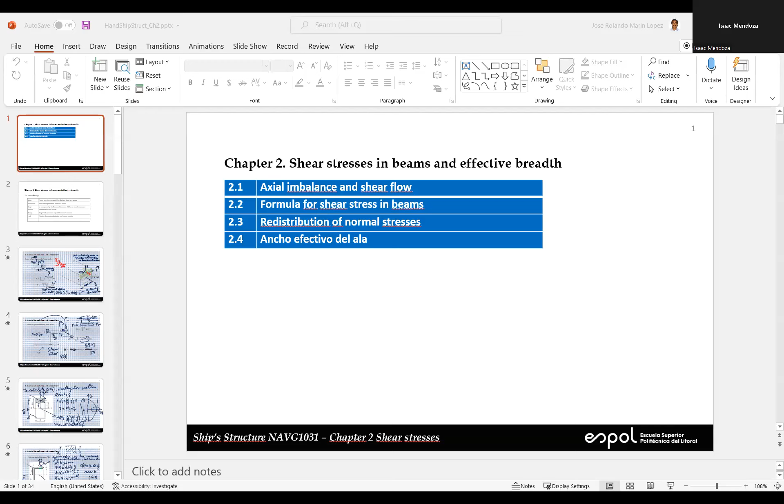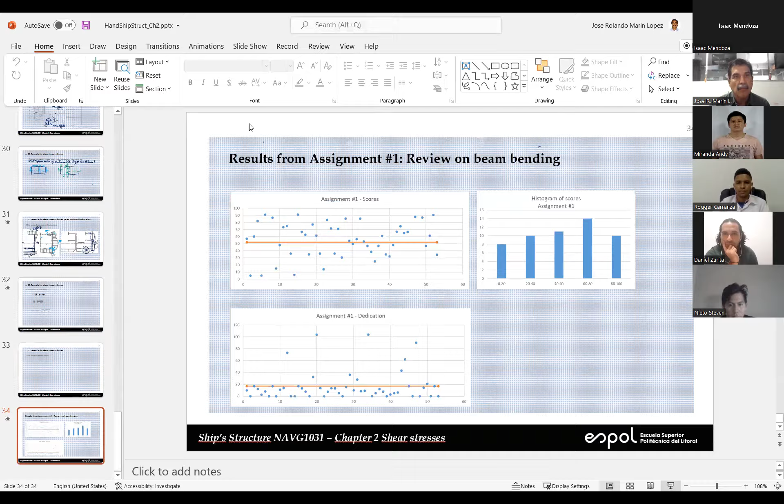Okay, let's continue. Andy, confirm me that you're looking at my projection. Andy, confirm me, please. Anybody? Yes, doctor. Okay, so I'm going to say two words, doctor.

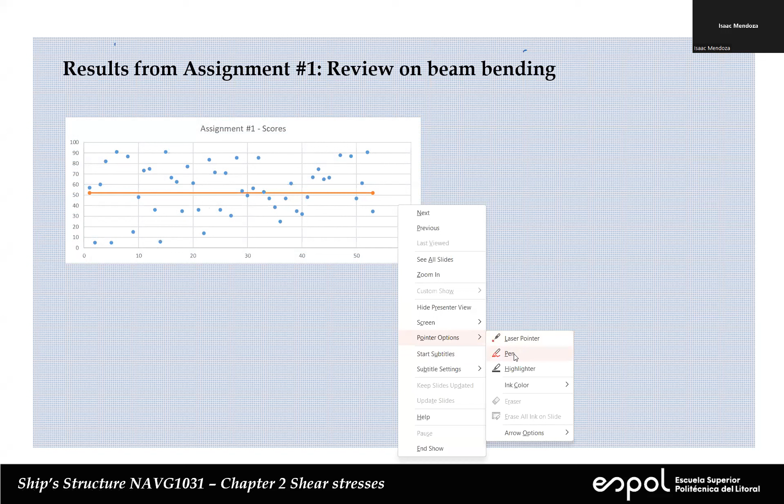About the result of assignment number 1, okay? These are the scores, the results of the evaluation. On the X axis you have the number of the student, and here you have the grade, the score that you obtained. This is the average, the average is about 51. So as you can imagine, an average of 51 is not something which I like.

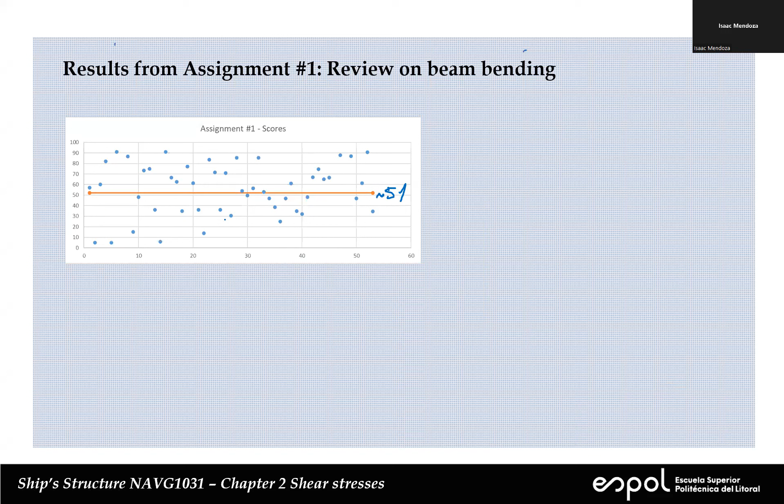I'm worried because usually when you have an assignment, you're supposed to come out in this area. So this, I don't know what they are doing. And even these people here, they're just around 60. So if you have questions, if you don't understand something, you have to say so, you have to come to office hours and things like that.

That's one thing. Here, this is the histogram of the scores. So here, you're supposed to be... okay, so if you are here to the right, that means you're above 60. And you see that all of these right now, they are behind the level for approval of this class. That means you better start working, because this is a review. This first homework is the review, so you were supposed to have already this material.

Something else, this is the number of hours, this is number of hours you reported. And these people here, they say that the time is larger than 60 hours. That's a lot. So at some other time, I would like to contact these students, because that just looks too much.

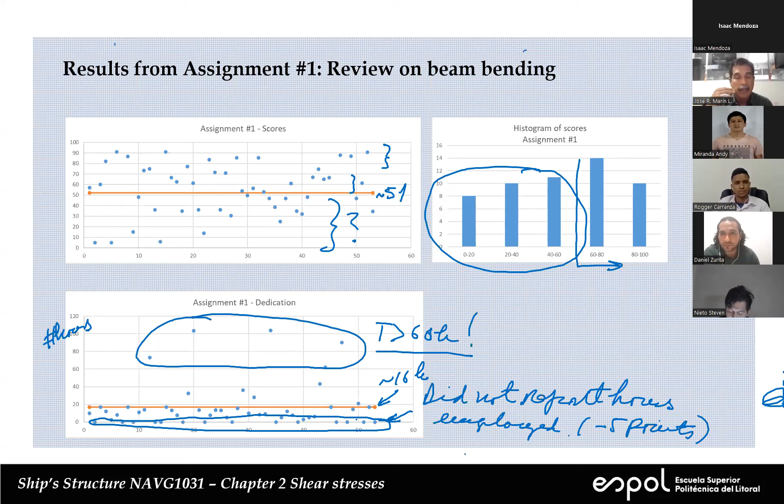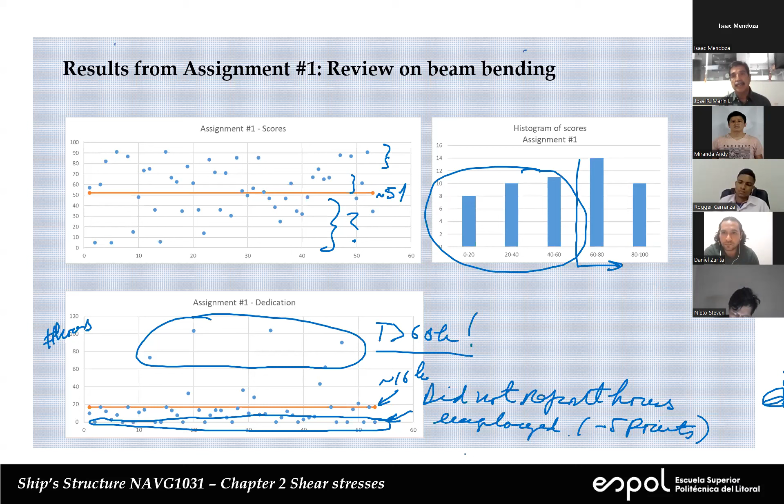That's enough. So from here, 2 messages. First, if you do not understand something, you have to come to office hours. You have to send a message, either to Engineer Isaac, Andy Miranda, Maria Sayo, or myself. We have office hours all over the week, you know our email addresses. If 2 or 3 people mention that they do not understand one question, that means I didn't explain correctly.

But the only way I can realize that something was not explained correctly is that you mention it. That's the only way. Otherwise I'm going to assume that it is well explained, and it is not. The problem is I don't have a way to know that this assignment was not correctly explained, unless you start asking me about it. Okay, people?

So let's go now to the description of what you are going to be doing Wednesday and Friday. Go on, Isaac. Okay.

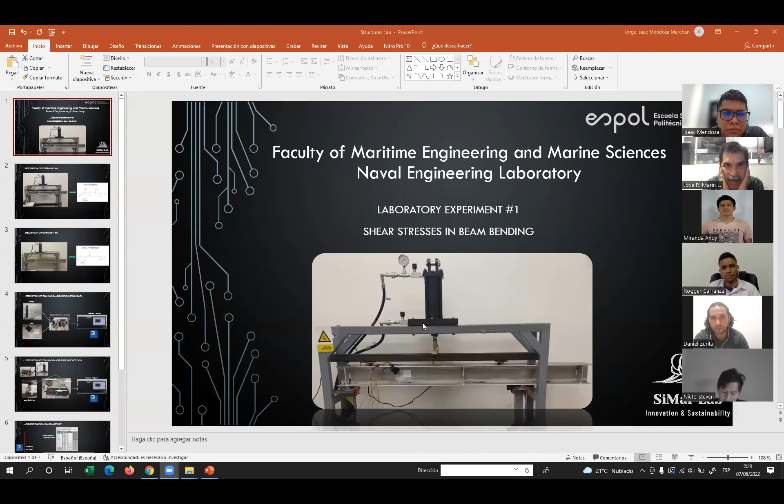Okay, good morning students. I'm going to give a general description of the experiment you're going to do in the lab, specifically Wednesday and Friday. In these two tests, you are asked to calculate the shear stresses and the effective breadth in these two cases.

So the first case consists of an aluminum beam that is simply supported. You can see the support at the left end and the right end. The first test consists in you applying a force, but this force is divided by 2 because it is supported by 2 supports.

Immediately you see on the right hand side the free body diagram. So you see the aluminum beam that is simply supported, and you see these two forces applied in a symmetrical form.

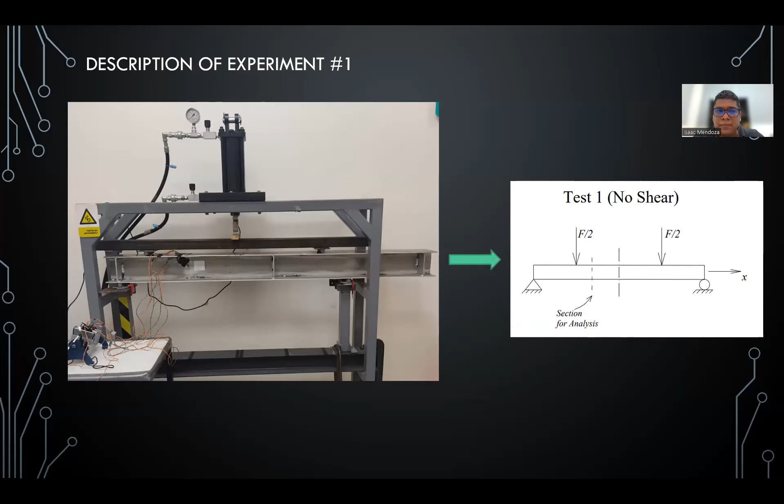Okay, the second test is similar. This aluminum beam is simply supported, but the force is like a concentrated force. So the distribution of the shear force is different from the last one.

Okay, so in this case, in these sections, you have shear force, so the data from the strain gauge is different.

Okay, the profile of the beam is a cross section type I. So you can take the dimensions when you come to the lab.

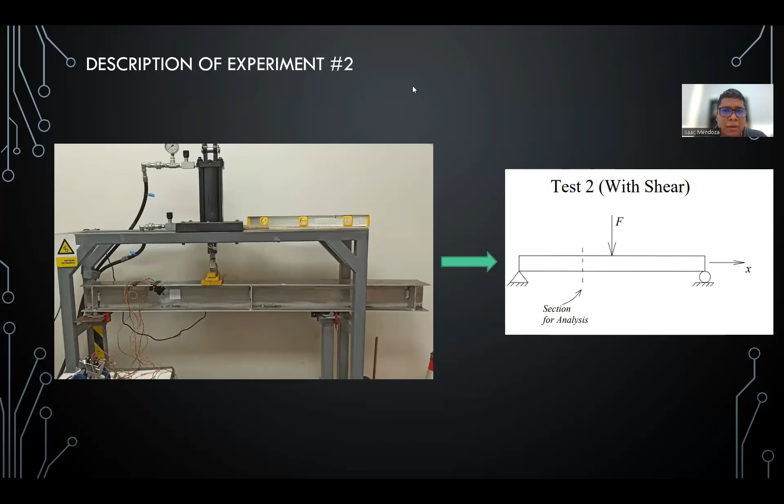The description of the equipment is the following. So you see that on the flange of the beam there are 4 strain gauges that are used to calculate the effective breadth.

And then on the web, around the neutral axis, you see there are three strain gauges. So this data from these strain gauges is used to calculate the shear stress using Mohr's circle.

Okay, you have to check this information from the past course. And in order to register strain data...

You have to connect these strain gauges to the acquisition strain equipment like this, and then in the same way connect this strain equipment to the computer. On the computer desktop there is a program called National Instruments plus Omega. In this experiment, you are going to save strain data and force data simultaneously.

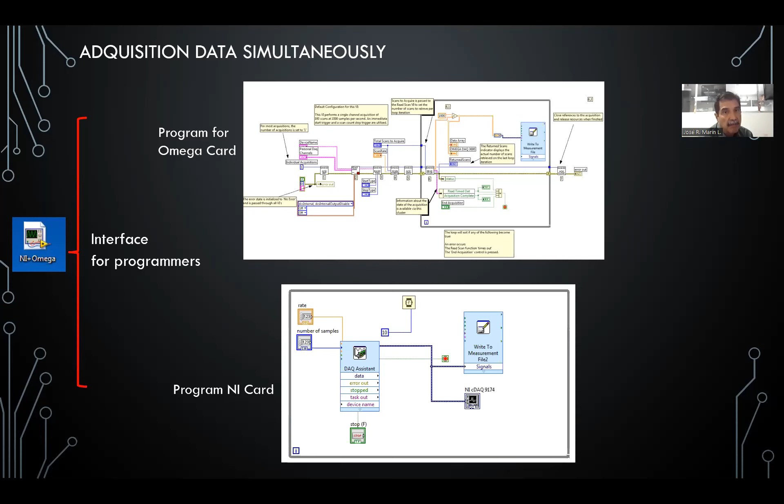Isaac, don't you have one of those files at hand so you can show them? After you finish this. Yeah, this is the finish, this is the end. Please show them, it's a good idea.

You see, for example, Omega data for the force, and then a strain gauge for the strain gauge. So in this folder you see these two files. Can you open one of those files? Yes, for example, the strain gauges. There's nothing... oh, there you go.

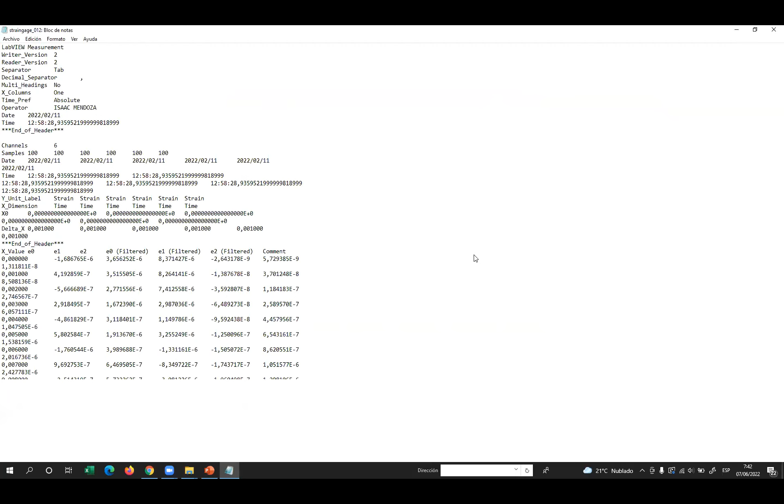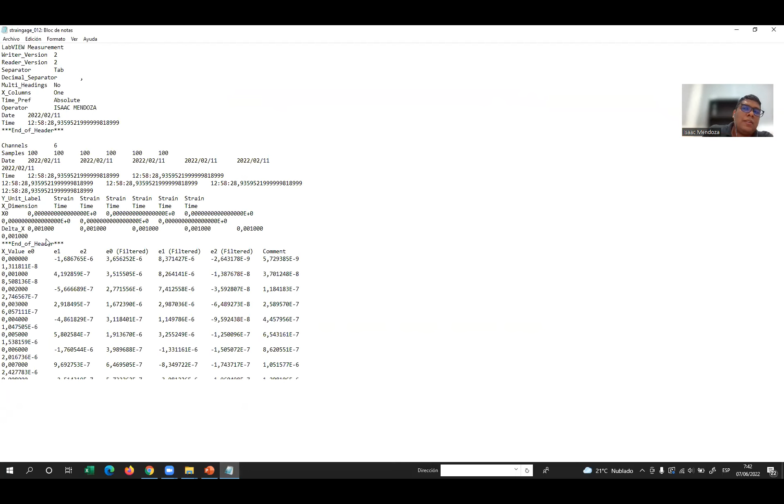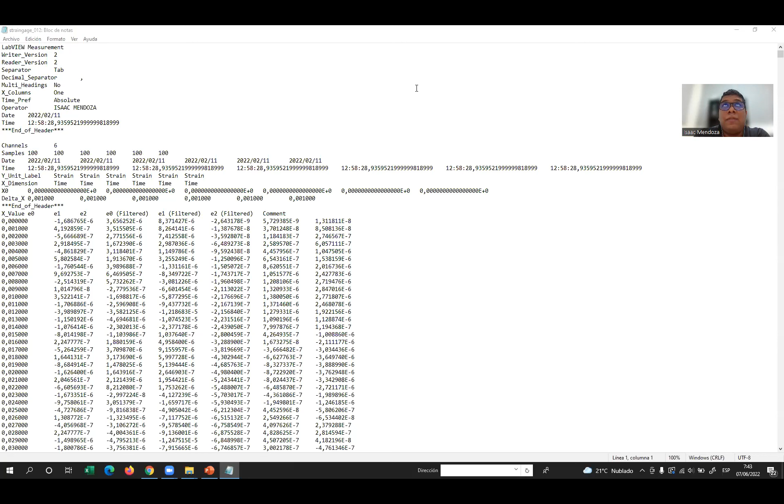This is from the other experiment, but it's similar to when you obtain the value of the strain. This is the column of the times, and then the value of the strain gauge. In your case, you have 7 strain gauges, so you have 7 columns in this part. In the other TXT files, Omega, you see 2 columns, one for the times and the other for the force in millivolts.

Okay, that's all, doctor.

Try to see what position on the beam corresponds to each one of the signals, and then plot against the force, because that's what we need. The problem is that the force is in the other file, so you have to take that information, put it in the same file, import it from Excel, and with the column of millivolts, convert that into newtons. And then you have to do the calculations.

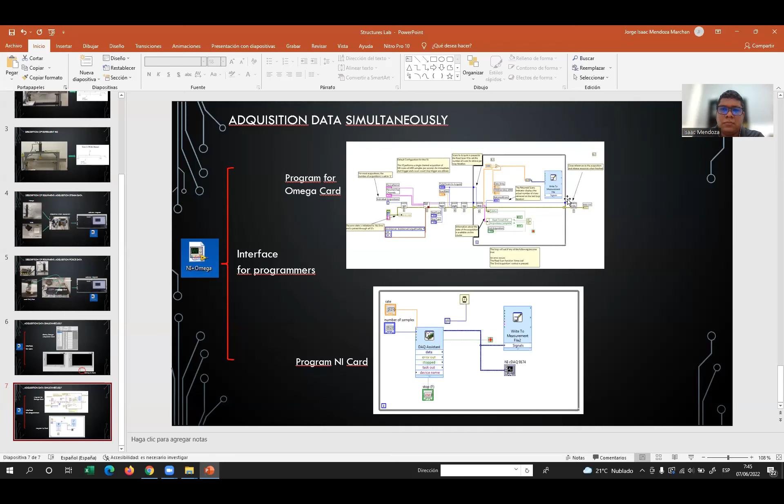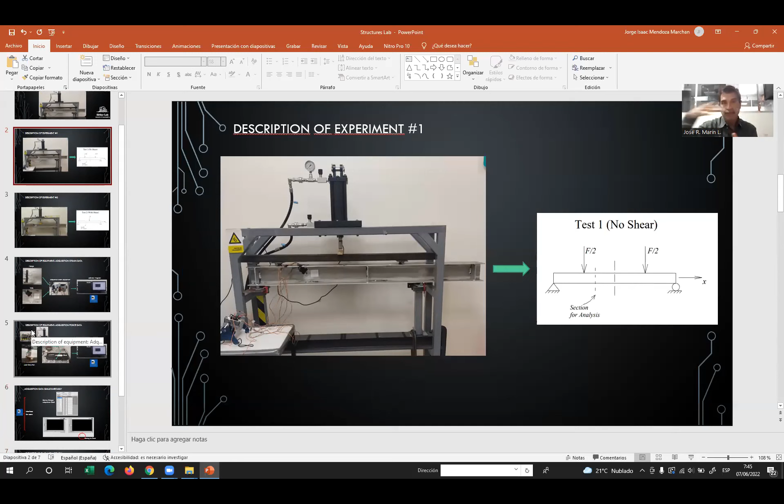With the 3 signals around the neutral axis, with the 3 signals in X, in Y, and at 45 degrees, you can calculate gamma. I'll comment on that later. From the signals on top, I will explain after we return next week how to calculate what we call the effective breadth with those signals. So you have to do those 2 calculations. That's the general idea of what we need to do.

Let me draw here. Can I draw here? Okay. Exactly, I don't know. Oh no, I can, give me here.

Even if you believe it or not, here I have 3 strain gauges. When you come to the lab you will see it in detail. There's going to be one in this direction, the X direction, that measures epsilon in the X direction. What do you think will be the value from that strain gauge? This one here, number 3, is located in the X direction.

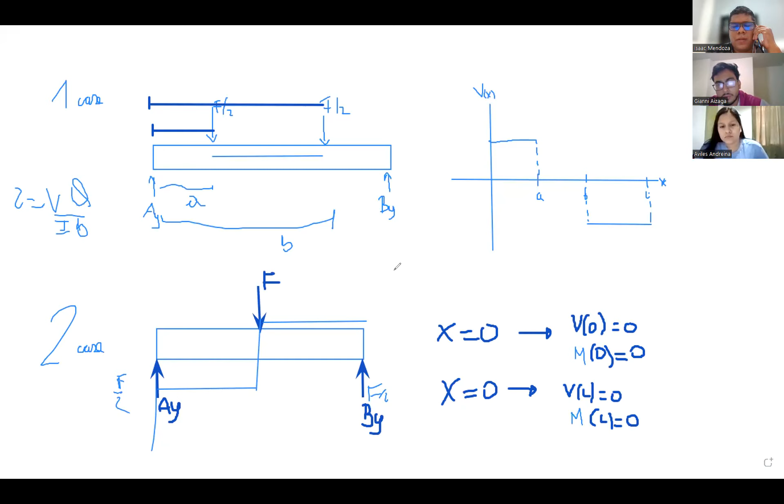Aló, doctor. Ya. Ya. Ya. Ya. Ok. Ok. Ok. Ok. Ya, doctor.

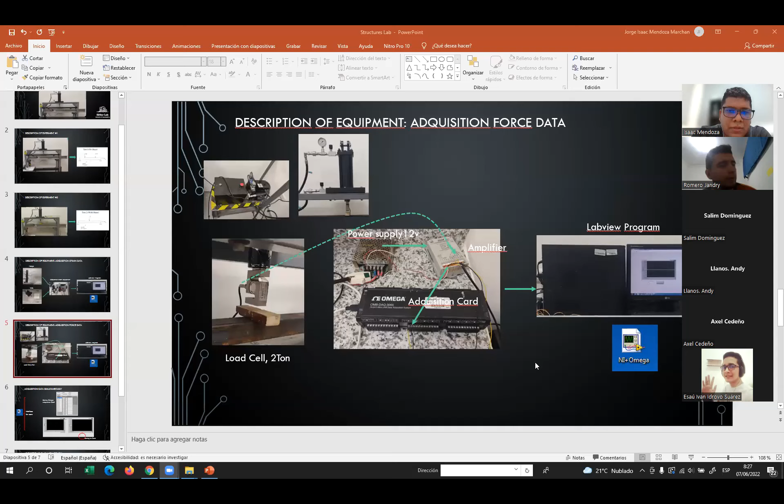Can you repeat the relation between the millivolts and the force? I didn't get it. The relation between the millivolts and the... okay, tons. Okay. 10 volts is 2 tons.

This is the formula. Okay.

So in summary, you have to prepare the distribution of the shear force in these two tests. When you prepare the distribution of the shear force, in the first setup you have no shear force in this part. But in this part, in test 2, you have shear force in these sections. So the graph is that.

So in this part, you have the reactions F divided by 2, and the other reaction F divided by 2. And this is the force. So the reaction is, in this part, F over 2. But in this part, in this first test, there's no shear force.

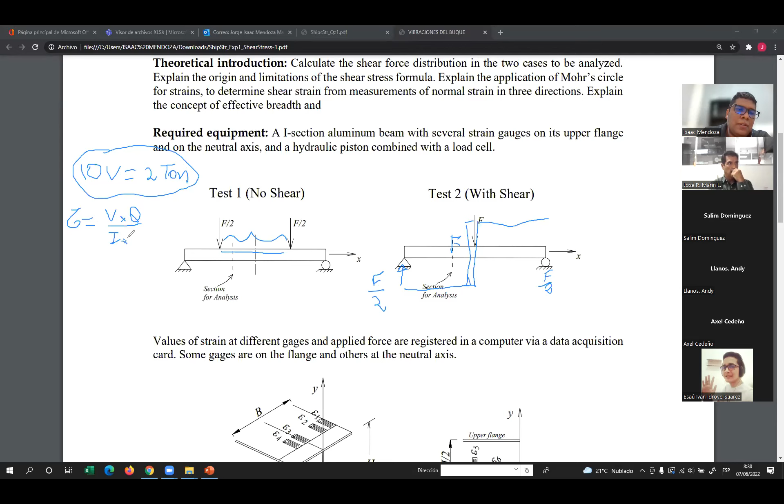So in the theoretical forms, you have to calculate the shear force. The shear stress is equal to the shear force, what else, Q divided by inertia per thickness, right? So this is the formula that you have to use to calculate the shear stress theoretically in these two cases.

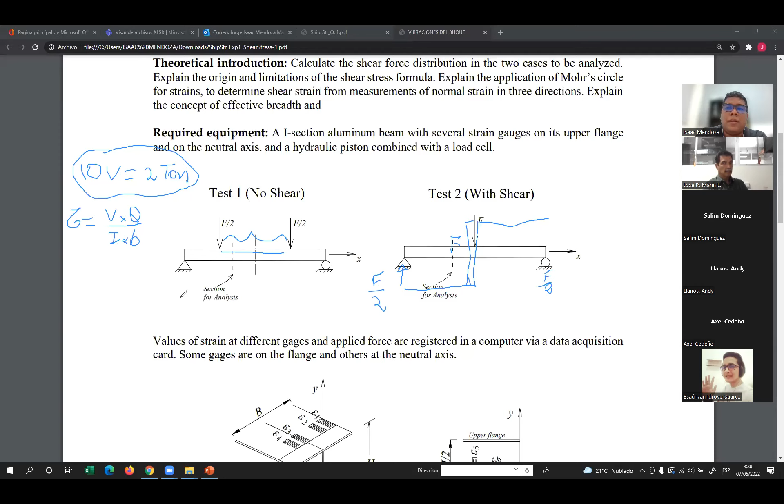And in the experimental forms, with these three strain gauges, you have to review the Mohr's circle in order to obtain gamma. When you take gamma multiplied by G, you get the shear stress in an experimental form. You have to review the Mohr's circle.

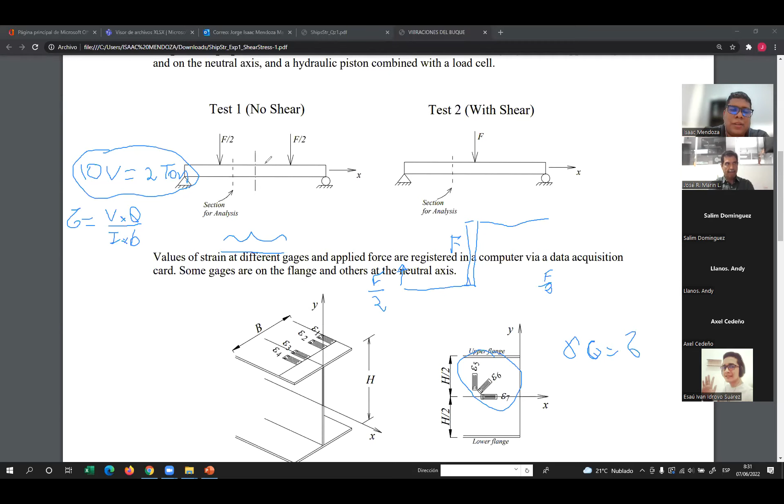Hopefully these two values are close, okay? Theoretical and experimental value. But you have to calculate the distribution of the shear force in these two cases. For this value of the strain data, you have to save it for this moment, and then when the doctor explains the concept of the effective breadth, you have to calculate this. You have to use this data in the next week. But in this week you have to concentrate on the shear stress.

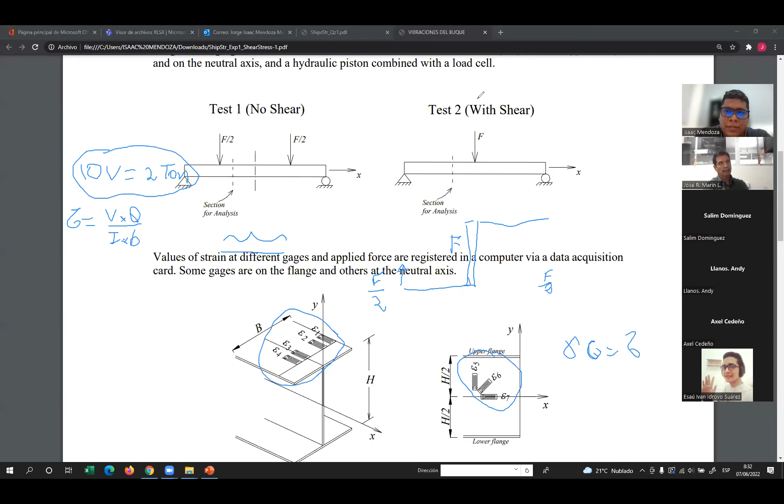Questions? What does it mean that test number 1 has no shear? Okay, because there are two tests. One, simply supported, the force is divided by 2, because the force is in contact by 2 supports at the top of the beam. In these configurations, when you resolve the problem and obtain the distribution of the shear force, what is the distribution of the shear force in this problem?

So you have to check, and in the middle, you don't have shear force, because test 1 is not shear.

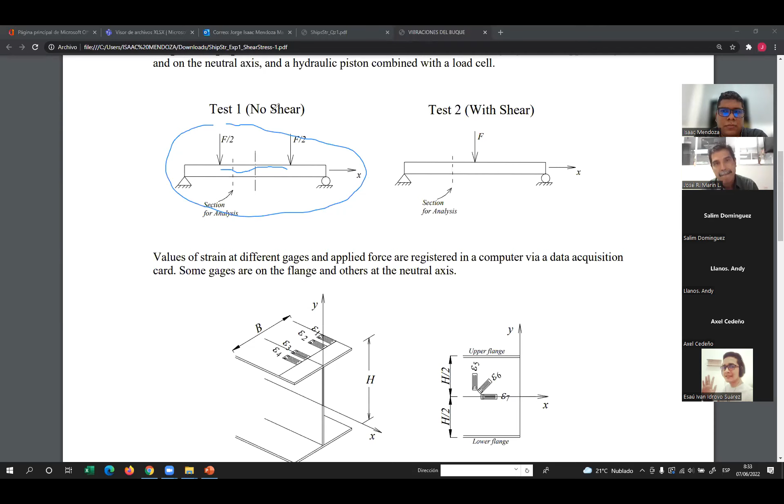Please, for the student who asked the question, make sure that you are able to check what Isaac said. Isaac is telling you the shear force distribution on this beam is zero between the two, F/2 and F/2. Please sit and solve the problem and check that it's indeed free of shear forces. And in the other case, he explained the distribution is here, then there's a jump, and you have another value. Check that.

Be sure that you are able to solve this. This is, please people, a statically determinate case. If you are not able to solve these problems, Isaac is in trouble, not me. Go on, Isaac, okay, this is easy to resolve.

So, this is a determinate case, simple supports, displacement 0, moment equal to 0, the p of x, these two concentrated forces, so you can go on and obtain the shear force distribution in both exercises, and then obtain the shear stress in a theoretical form and compare it to the experimental form.

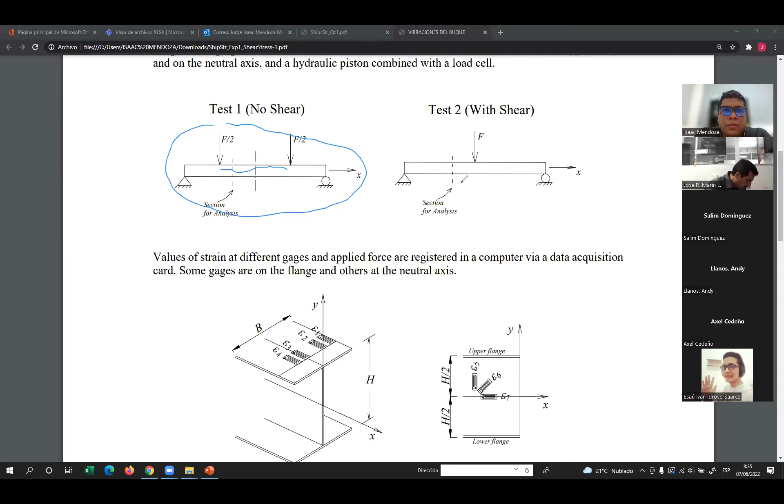So this is all for this experimental test. Now we are going to discuss in groups the last quiz that was taken in previous years.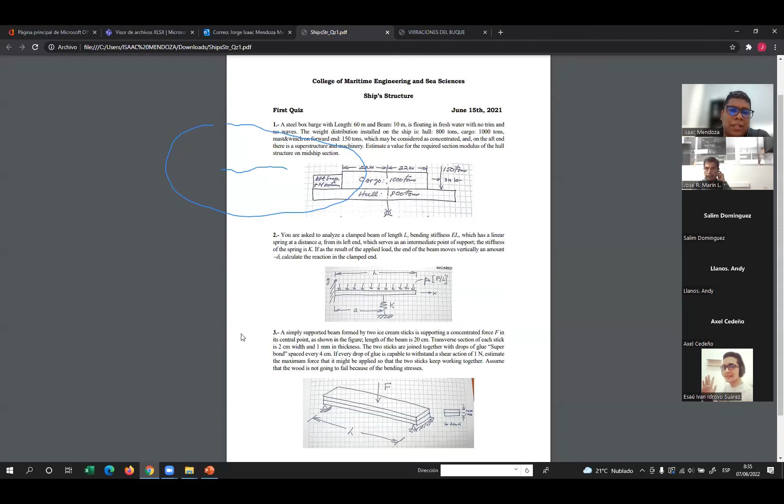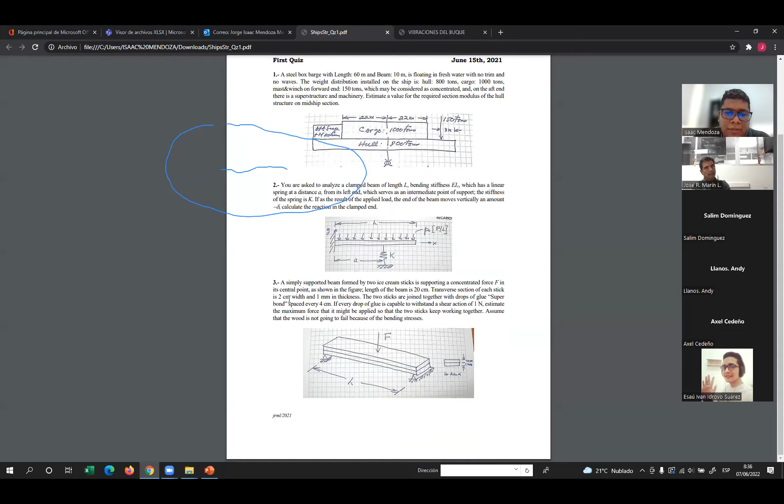So now we're going to work in groups. Groups number 1 to 4 resolve the first problem. Groups 5 to 8 or 9 resolve the second problem, and groups 10 to 12 resolve the last problem. Okay, I'll send you this by Zoom right now.

Okay, let me stop, then by message. Are you going to put it in a chat? No, I can't.

Let's take advantage that Isaac is working. People, I have to be sure that the timing, the schedule, everybody understands, okay?

So tomorrow, Wednesday, we need to start at 8. We are going to work with 2 groups at the same time, because otherwise we will have no time. So 2 groups will be in the lab completing the experiment. They will do both tests, get some results, and analyze that. At the same time, I will stay in the auditorium, and I will ask somebody randomly from the other 4 groups to come here and explain something from either assignment 1 or 2, very short, 2-3 minutes, that's all.

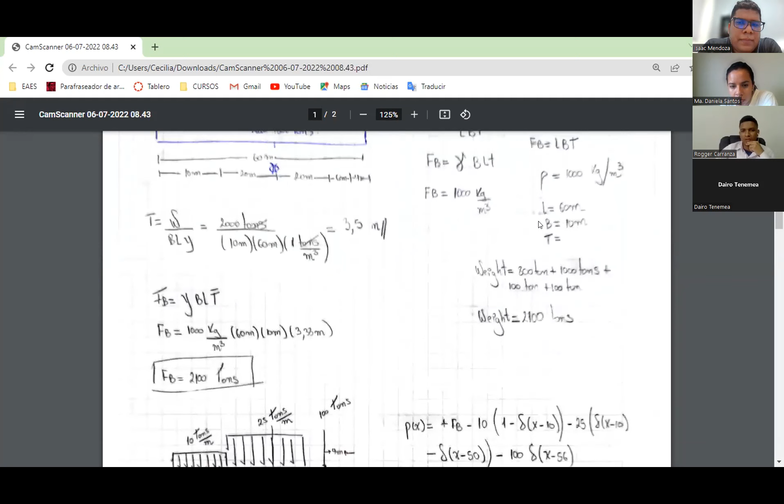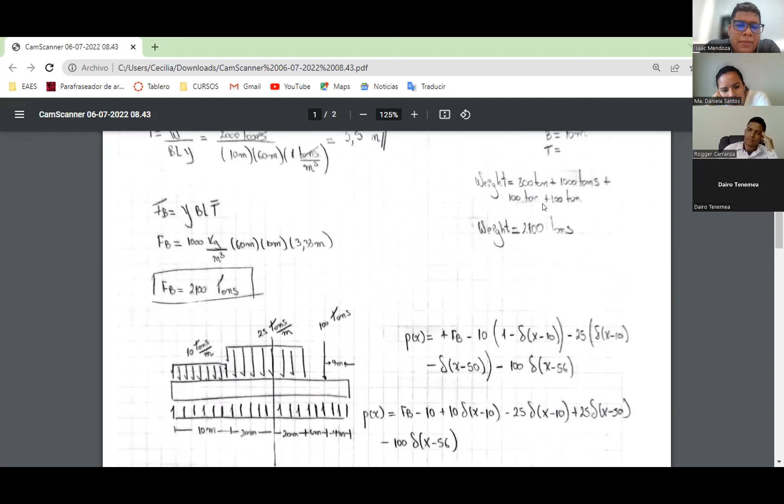Claro, sí, porque en este caso el CB es igual a 1. Claro, es lo mismo que el peso, pero dividido para... dividido para 60. Sí, se acaba de corregir eso. Y así, luego avanza. Sí, sí, efectivamente, ya corrijan eso y avancen.

Voy a continuar con el otro grupo.

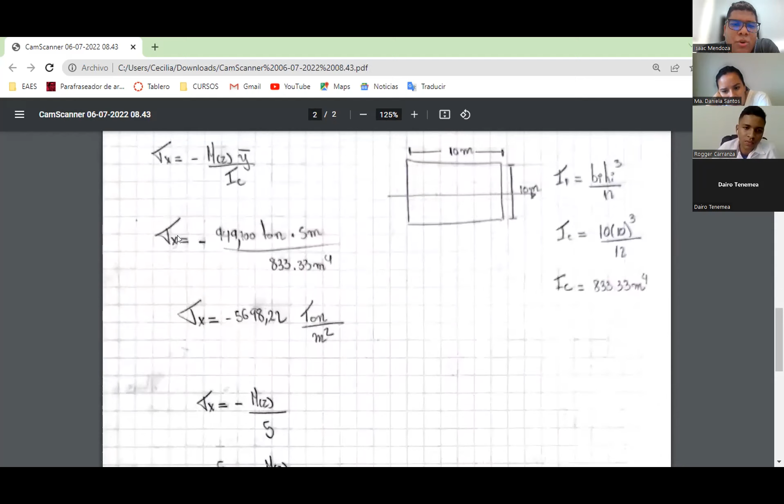O sea, mi duda es aquí en el módulo seccional. O sea, tengo que considerar, es módulo seccional, sigma es igual a momento sobre módulo seccional. No te está pidiendo inercia.

Ya. Sigma es igual a momento sobre el módulo seccional, ¿verdad? Ya, y de ahí, el módulo seccional es la inercia sobre el Y. Pero no es esta de acá, es la de acá. Entonces solamente necesitas el S, sería M dividido para sigma, así.

Momento dividido para sigma. Claro, para sacar el sigma tengo que sacar el momento por el Y y la inercia. No necesitas Y ni inercia. ¿Sí me entiendes? Sí, sí. A ver, deja ver. No, a ver, espérate. Dice, estime el valor requerido del...

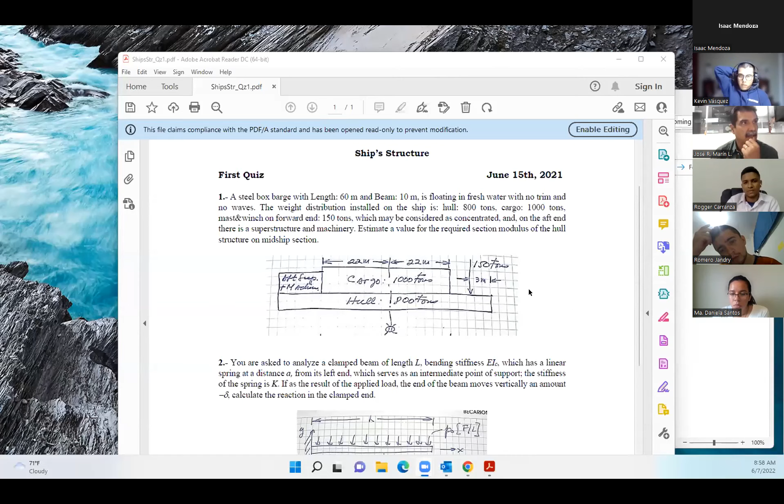I consider box barge as rectangular, if the section modulus equals minus bending moment divided by normal stress. Yeah, my question is, how did you calculate the bending moment? The bending moment is the...

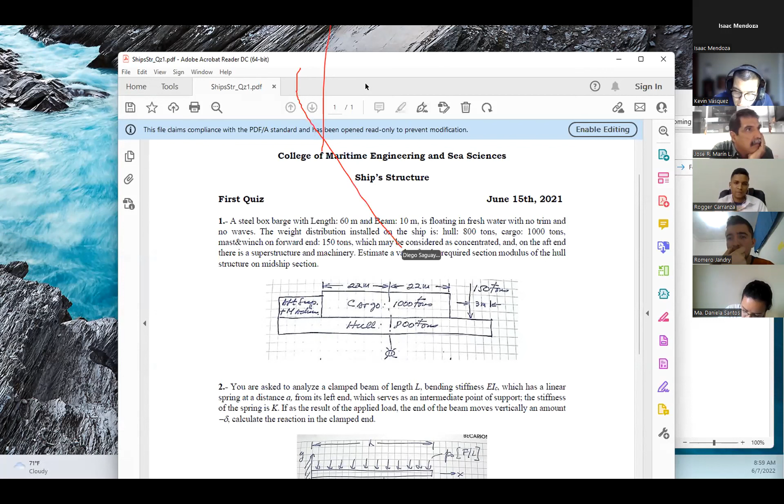What forces do you have on this beam? Okay, I consider the concentration in the first part, the buoyancy. Okay. How did you calculate the buoyancy? 2100 tons, I consider CB equal 1. Yeah, but it is a concentrated force.

No, divide by length. It's a distribution. I mean, the buoyancy is distributed, continuously distributed. Yes, so you have force upward, force downward, and on the forward end you have a concentrated force of 150. Yes, so you have to integrate from the aft end until the midship, and all of that.

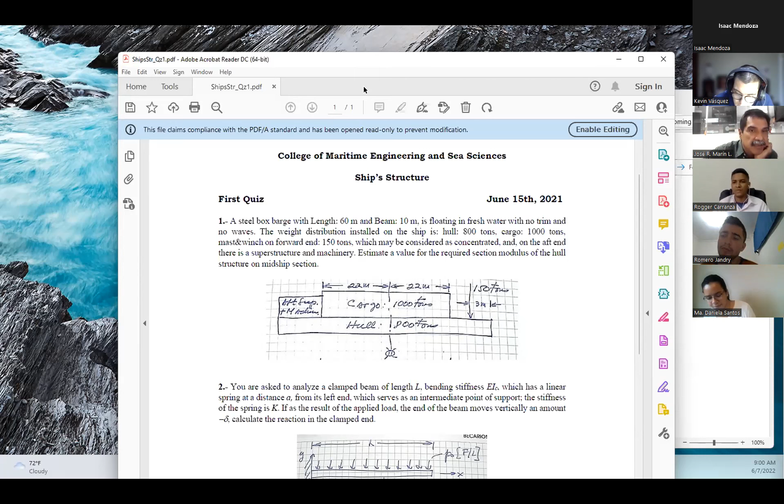Okay, and what are the boundary conditions at the left end? Free end. So tell me, what are the boundary conditions of the free end case? Shear force equals 0, and bending moment equals 0.

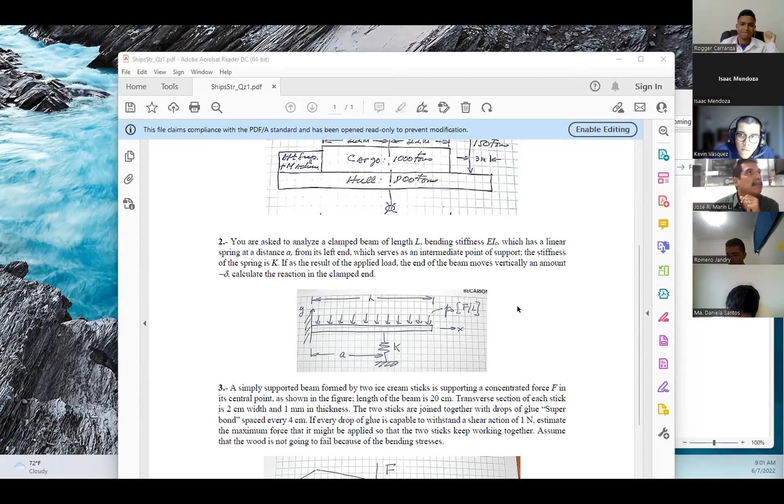Okay, anybody from the group who solved problem 2? Any questions about problem 2? Doctor, yeah go on. Anybody, group 2, problem 2? Any questions about the solution of problem 2? It's clear, good. Okay, let's go to problem 3.

Oh, Carranza, you have a question? Yes doctor, I resolved problem 2. I'm confused about the result. Why is that?

Yeah, but that's not a condition. Oh okay, that's not it. What are the boundary conditions at L, Mr. Guaman, in this case? Mr. Guaman, oh you have a problem with the connection. Mr. Nieto, what are the boundary conditions in problem 2 at the right end?

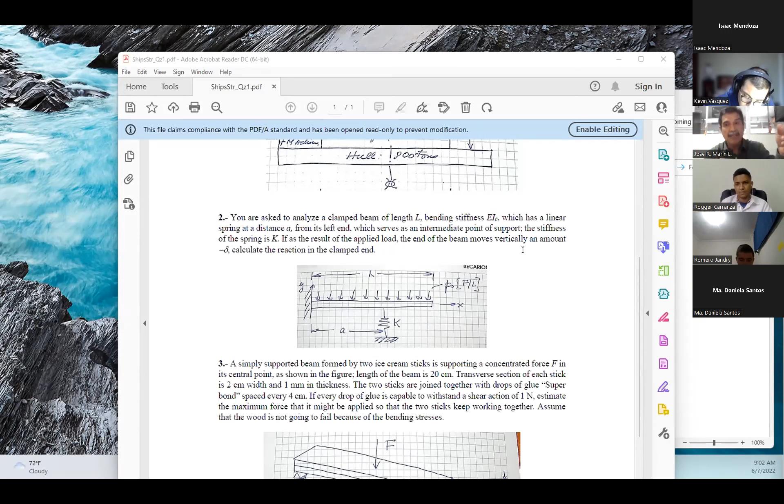What are the boundary conditions? Can you see this problem, Mr. Nieto? Yes doctor. Okay, come on, can you see? Okay, tell me.

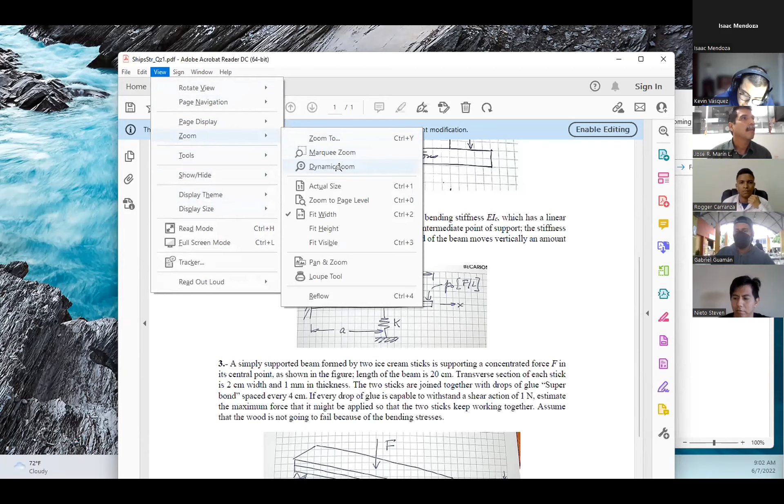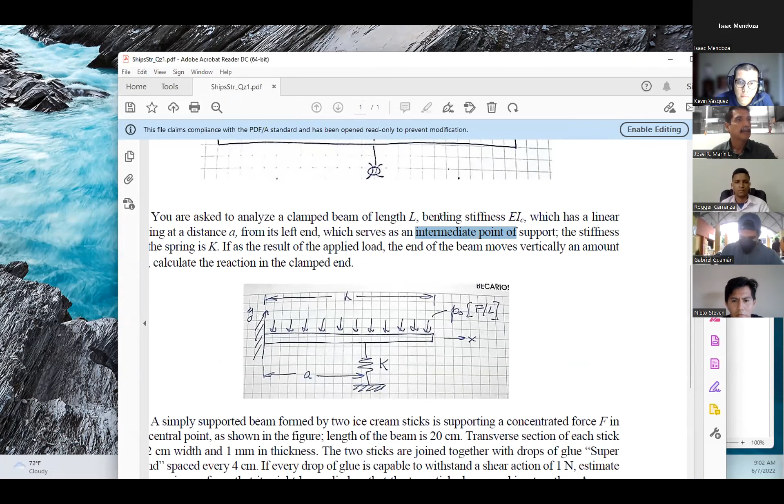Don't doubt. You shouldn't doubt. No? Okay.

Ms. Valdez, what are the boundary conditions at the right end of this case? Bending moment, problem 2. Shear force is 0. And the other? Bending moment is 0, yeah, it's a free end.

But there should be no doubt. No doubt. Remember, I always remember Arquitecto Sixto Durán Ballén, when we had the trouble with Peru, he said 'ni un paso atrás.' When it's talking about boundary conditions, there should be no doubt. Smiling, people? I'm not smiling.

Okay yes, and is there any other questions about problem 2? Any other questions about problem 2? Easy, right?

The value of the deflection at point A should be positive or negative? Negative. The deflection at point L should be larger or smaller than at point A? Larger. Those are ways to check your results.

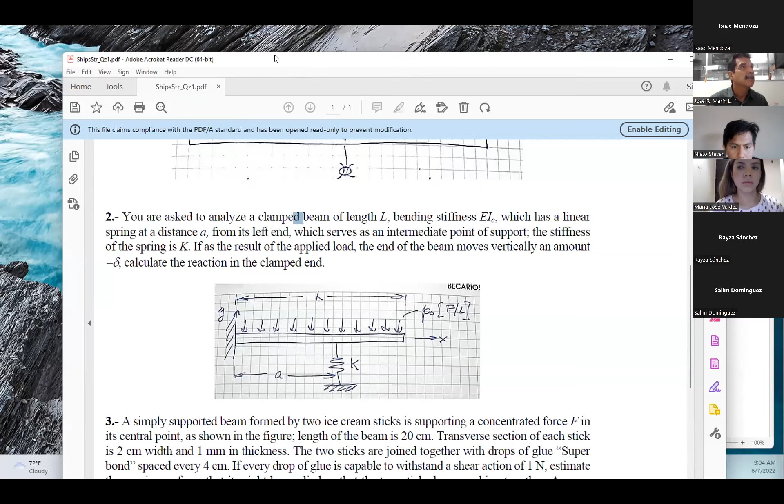The shear force about this point, okay? And I have now, let's... no, I cannot. Can you still see my screen, people? Yes sir, okay.

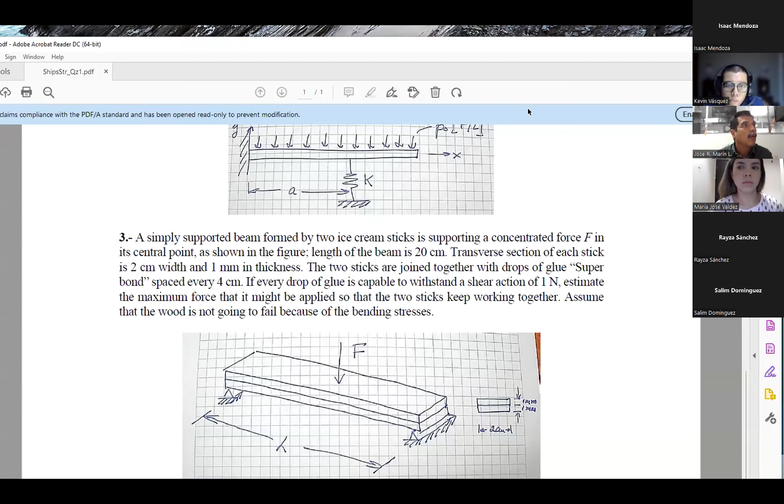Okay, let's go to problem 3 because I'm running out of time. Any questions on problem 3, people? Any questions on problem 3? Problem 3, questions? Questions on problem 3? No questions. Well understood.

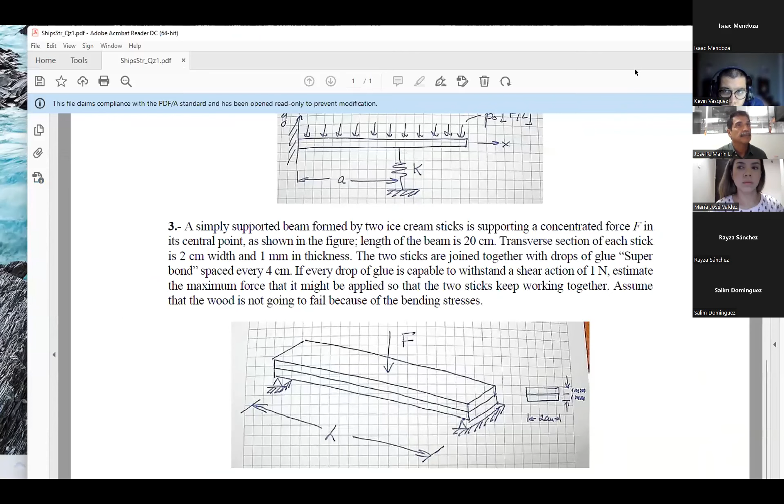People, questions on problem 3? The shear action—is it the force or the shear stress? The force F generates shear stresses. The shear force, the force F, generates shear stresses.

The problem is that the two sticks are like this, right? If you have glue, the two work together. If you have just a little bit of glue, they will slide one over the other. So it's like having 1 and 2 beams. But if you glue them together, the height will be twice, and the inertia will be that 2 raised to the 3rd power. So the inertia of having the two glued together is higher than having the two added, because they can slide over each other. In this case, the inertia is lower than when the two are glued together. That's why you need to be sure you put enough glue in order to avoid the shear breaking up the glue. That's the reason.

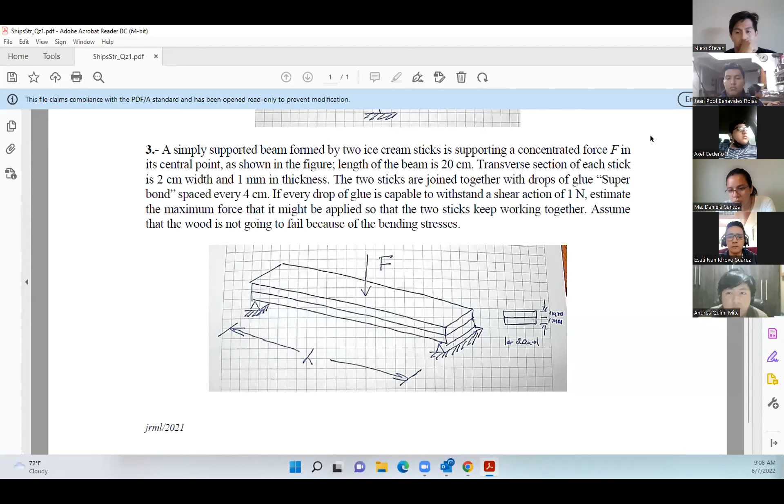The first rule for an exam is to be well rested. If you stay up tomorrow until 2 a.m. studying, on Thursday you will be tired. So try to study today and tomorrow, but on Wednesday try not to stay awake until too late, because otherwise you won't have enough rest. Believe it or not, a test, a quiz, demands a lot of energy, lots of energy. So try to be rested. Try to have a good breakfast.

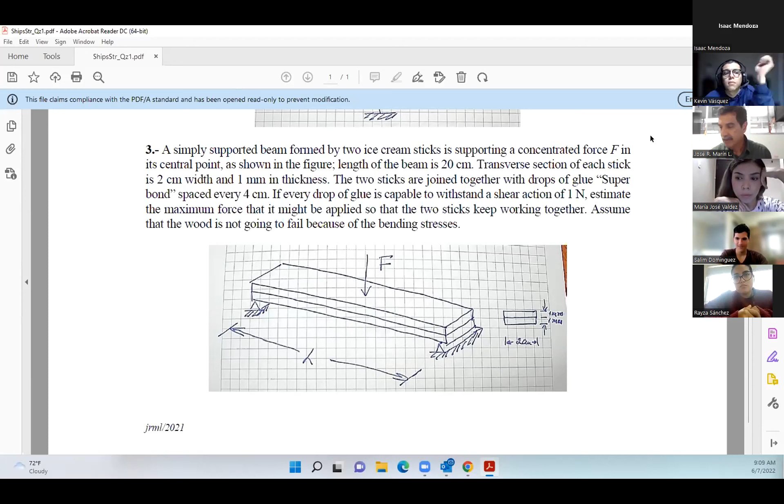When you come to the exam, the first thing you have to do is read the question. Ms. Flores, what's the first thing you have to do after receiving the exam? Read the question. Yes, read the question. I'm sorry to insist on this. What's the first thing you have to do when you get the exam, Mr. Sawai? Read the question. I'm 65 years old, people, believe me—65, I'm a grandfather, 65, I have enough experience. Read, read. You don't understand the question? Don't start writing, read it again. Don't understand it? Read it again.

It is quite often—not only you, me too. I read something, just a bit of two words here, the second line, and that's all; the rest I assume is wrong. You should read the whole question. If you do not understand what they are asking, you have to go back and read it again. Don't start writing unless you understand what the question is about. That's all I can say. Well rested, read the question. Then you can think, and finally write.

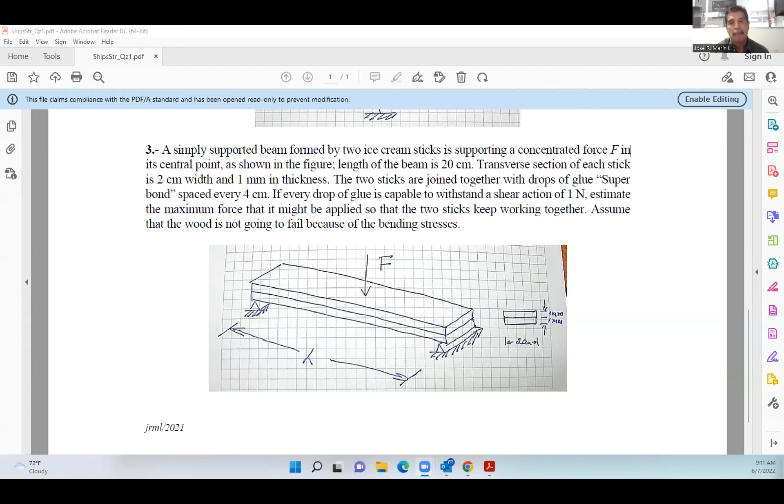That's the order: read, then think, then write. Read, think, write. Okay, people, if there are no more questions, then I'll see you Thursday, Doctor.